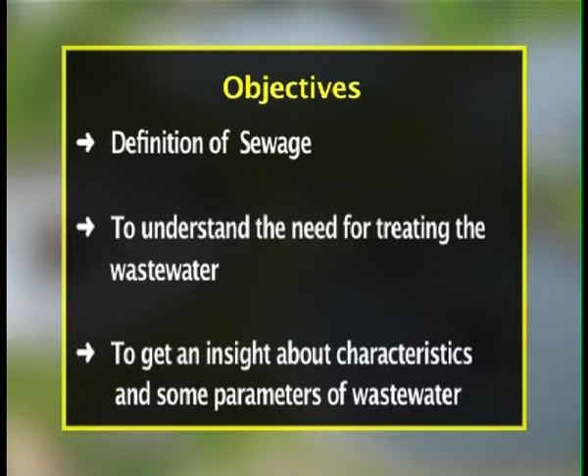Objectives of our study are: definition of sewage, that is wastewater; to understand the need for treating the wastewater; to get an insight about characteristics and some parameters of wastewater; to know about the whole process of conventional wastewater treatment; and lastly, to study the importance of disinfection of treated water.

Water is vital to the existence of all living organisms, but this valued resource is increasingly being threatened as human populations grow and demand more water of high quality for domestic purposes and economic activities. Among the various environmental challenges that India is facing this century, freshwater scarcity ranks very high.

India, being an economy in transition, faces two problems. On the one hand, there is a lack of infrastructure, and on the other, an ever increasing urban population. This has thrown up two self-perpetuating problems, that is, shortage of water and sewage overload. Water supply, sanitation measures, and management of sewage and solid wastes cover only a fraction of the total urban population.

There is a clear inequity and disparity between the public services received by inhabitants, depending on their economic strata. Slum dwellers have always received least attention from the civic authorities. The majority of towns and cities have no sewerage and sewage treatment services.

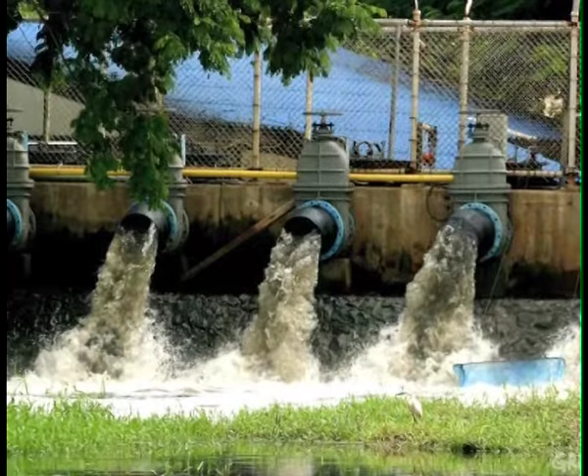Wastewater is not just sewage. All the water used in the home that goes down the drains or into the sewage collection system is wastewater. This includes water from baths, showers, sinks, dishwashers, washing machines, and toilets. Small businesses and industries often contribute large amounts of wastewater to sewage collection systems. In combined municipal sewage systems, water from storm drains is also added to the municipal wastewater stream.

Wastewater is about 99% water by weight and is generally referred to as influent as it enters the wastewater treatment facility. Domestic wastewater is wastewater that comes primarily from individuals and does not generally include industrial or agricultural wastewater. At wastewater treatment plants, this flow is treated before it is allowed to be returned to the environment, lakes or streams.

Dear students, now let us discuss wastewater generation and its treatment. It's estimated that about 38,254 million litres per day of wastewater is generated in urban centres comprising class 1 cities and class 2 towns having population of more than 50,000, accounting for more than 70% of total urban population. In view of population increase, demand of fresh water for all uses will become unmanageable.

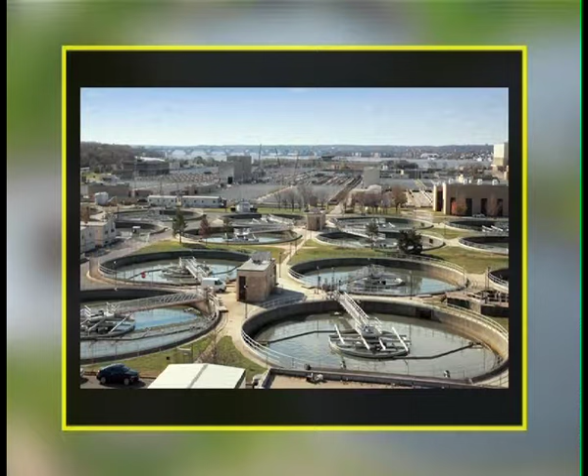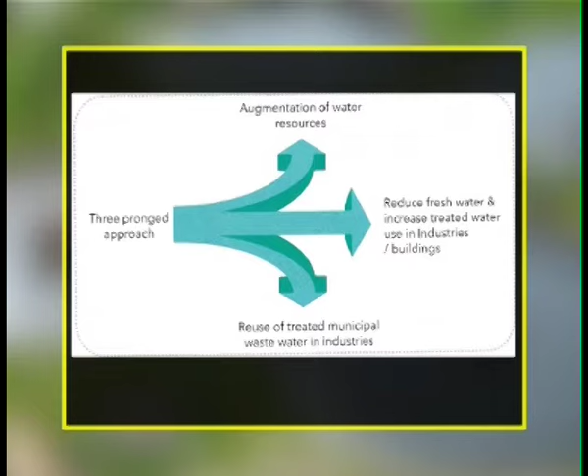Central Pollution Control Board studies depict that there are 269 sewage treatment plants in India, of which only 231 are operational, and thus the existing treatment capacity is just 21% of the present sewage generation. There is a need to plan strategies and give thrust to policy, giving equal weightage to augmentation of supplied water as well as development of wastewater treatment facilities, recycling, recovery, recharging and storage.

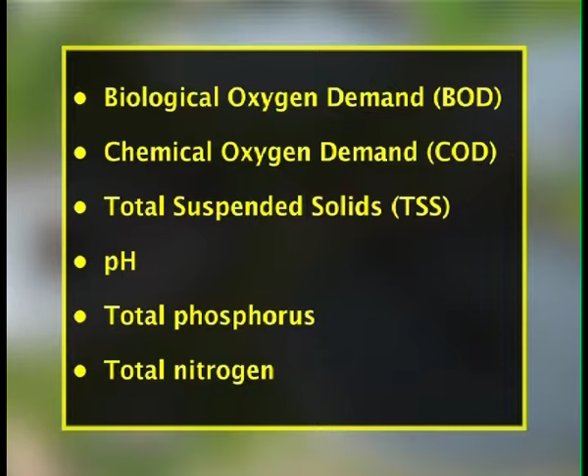Now, let's discuss the characteristics of urban wastewater. Urban wastewater is characterized in terms of its physical, chemical and biological constituents. The more common analyses used to characterize wastewater entering and leaving a plant are biological oxygen demand, chemical oxygen demand, total suspended solids, pH, total phosphorus and lastly total nitrogen.

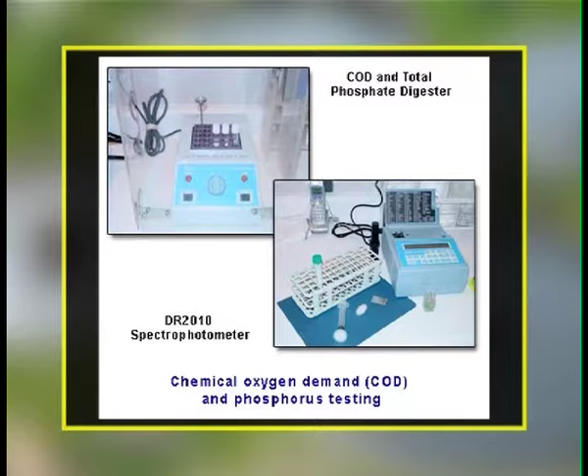Now the parameters by which wastewater is measured. Firstly, the biological oxygen demand, BOD. BOD is the amount of oxygen used by organisms while consuming organic matter in a wastewater sample. It's possible to assess the performance of a wastewater treatment plant by measuring the BOD of the inflow and the outflow. Many factors can influence this test, such as temperature of incubation, dilution rate, nitrification, toxic substances, nature of bacterial seed and presence of anaerobic organisms.

Now, chemical oxygen demand. The COD test uses the oxidizing agent potassium dichromate to oxidize organic matter in the sample. The test is extensively used because it takes less time than other tests such as BOD, which takes 5 days. The COD test does not, however, differentiate between biodegradable and non-biodegradable organic matter.

For municipal wastewater, it is generally possible to establish a relationship between COD and BOD. Once a correlation has been established, the COD test can be a very useful indicator for the operation and control of the plant.

Total suspended solids, also termed as TSS. TSS is the sum of the organic and inorganic solid concentrations and can be subdivided into suspended solids, organic solids, inorganic solids and lastly colloidal suspended solids. Firstly, the suspended solids. Suspended solids represent those solids that are in suspension in the water, generally comprised of 70% organic and 30% inorganic solids, and can be removed by physical or mechanical means.

Secondly, organic solids. Organic solids form about 50% of solids present in urban wastewater, derived from the waste products of animal and vegetable life. Sometimes also called the combustible fraction or volatile solids, as these can be driven off by high temperature. Inorganic solids. These substances are inert and are not subject to decay, and these include sand, gravel, silt.

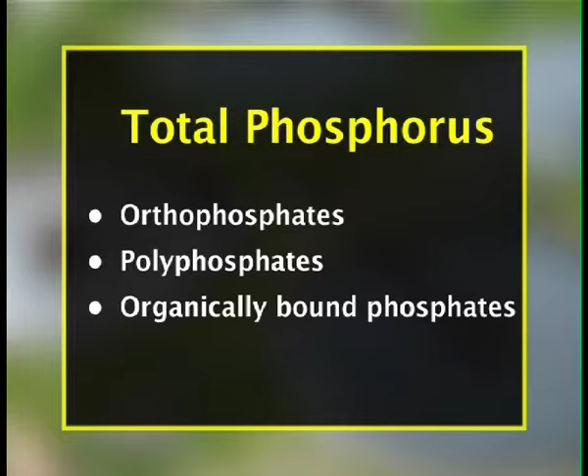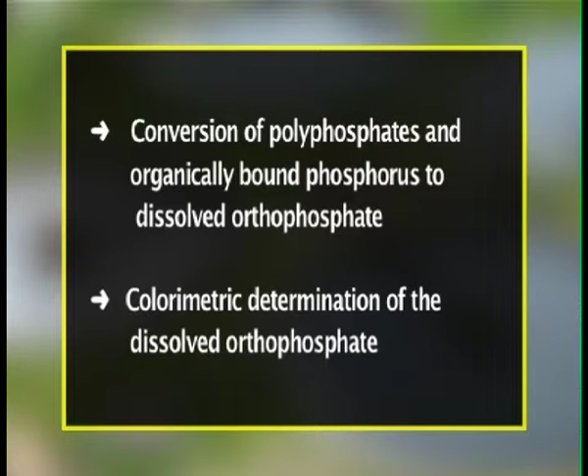Now, total phosphorus. This parameter is normally divided into 3 fractions, namely orthophosphate, polyphosphate, and organically bound phosphate. Total phosphorus analysis requires 2 steps: conversion of polyphosphates and organically bound phosphorus to dissolved orthophosphate, and colorimetric determination of the dissolved orthophosphate. In instances where phosphorus is a growth limiting nutrient, the discharge of wastewater containing phosphorus may stimulate the growth of vegetation in the water body.

Lastly, the total nitrogen. This refers to the sum of measurements of total oxidized nitrogen, that is nitrate and nitrite, and total Kjeldahl nitrogen, that is ammonia and organic nitrogen. This parameter is a growth limiting nutrient in marine environments, and a limit is specified in urban wastewater treatment regulations for discharge to sensitive water bodies.

Now the BOD to nitrogen to phosphorus ratio. In order to operate satisfactorily, microorganisms require a balanced diet. This is normally achieved by maintaining the level of BOD to nitrogen to phosphorus in the wastewater at about the ratio of 100 to 5 to 1. Domestic sewage is not normally deficient in these elements, but industrial effluents may be, and this can lead to a nutrient deficiency in the inflow to a plant.

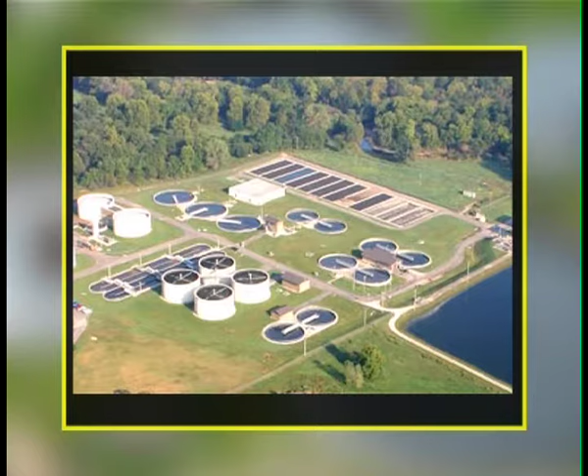Now, let us talk about conventional wastewater treatment processes. Conventional wastewater treatment consists of a combination of physical, chemical and biological processes and operations to remove solids, organic matter and sometimes nutrients from wastewater.

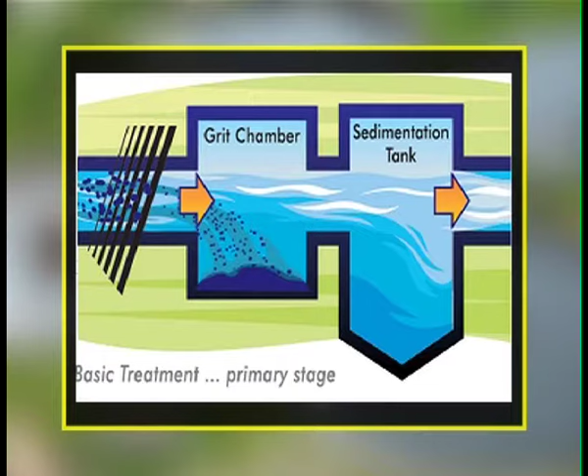Firstly, the preliminary treatment. The objective of preliminary treatment is the removal of coarse solids and other large materials often found in raw wastewater. Removal of these materials is necessary to enhance the operation and management of subsequent treatment units. Preliminary treatment operations typically include coarse screening, grit removal, etc.

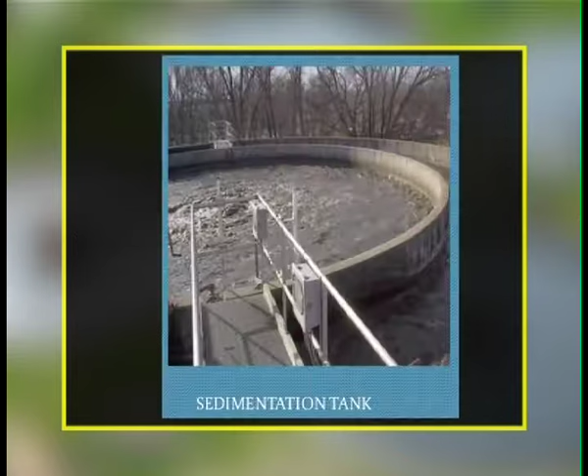Now, the primary treatment. The objective of primary treatment is the removal of settleable organic and inorganic solids by sedimentation and the removal of materials that will float, that is scum, by skimming.

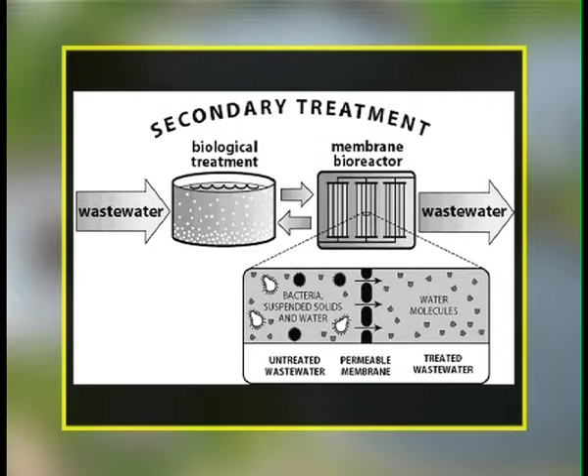Secondary treatment. The objective of secondary treatment is the further treatment of effluent from primary treatment to remove the residual organics and suspended solids. In most cases, secondary treatment follows primary treatment and involves the removal of biodegradable dissolved and colloidal organic matter using aerobic biological treatment processes.

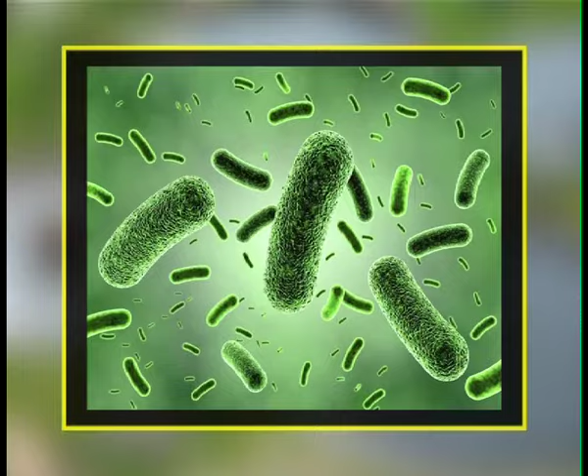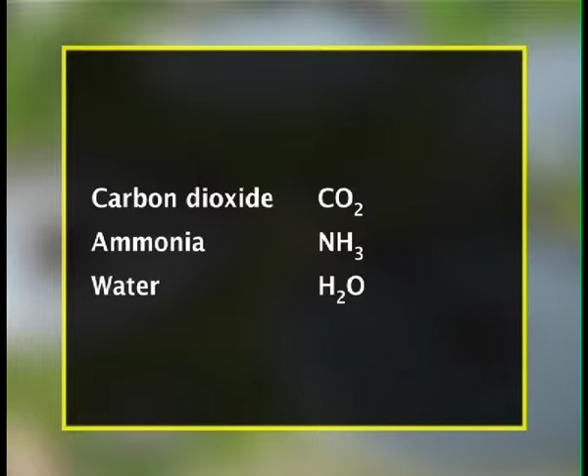Aerobic biological treatment is performed in the presence of oxygen by aerobic microorganisms, principally bacteria, that metabolize the organic matter in the wastewater, thereby producing more microorganisms and inorganic end products, principally carbon dioxide, ammonia and water. Several aerobic biological processes are used for secondary treatment, differing primarily in the manner in which oxygen is supplied to the microorganisms and in the rate at which organisms metabolize the organic matter.

Common high-rate processes include the activated sludge processes, trickling filters or biofilters, oxidation ditches, and rotating biological contactors. A combination of two of these processes in series, for example, biofilter followed by activated sludge, is sometimes used to treat municipal wastewater containing a high concentration of organic material from industrial sources.

Now, activated sludge process. The common suspended growth process used for municipal wastewater treatment is the activated sludge process. The municipal wastewater treatment is the biochemical oxygen demand removal. The removal of BOD is done by a biological process such as the suspended growth treatment process.

The biological process is an aerobic process and takes place in the aeration tank in which the wastewater is aerated with oxygen. By creating good conditions, bacteria will grow fast. The growth of bacteria creates flocs and gases. These flocs are removed by a secondary clarifier.

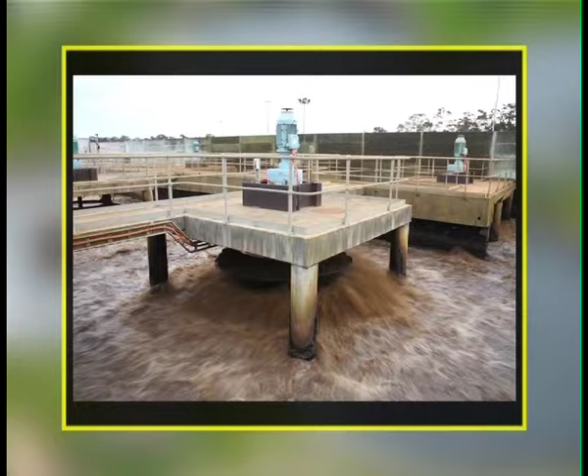In the activated sludge process, the dispersed growth reactor is an aeration tank or basin containing a suspension of wastewater and microorganisms, that is the mixed liquor. The contents of the aeration tank are mixed vigorously by aeration devices which also supply oxygen to the biological suspension.

Hydraulic retention time in the aeration tanks usually ranges from 3 to 8 hours but can be higher with high BOD wastewaters. Following the aeration step, the microorganisms are separated from the liquid by sedimentation and the clarified liquid is secondary effluent.

A portion of the biological sludge is recycled to the aeration basin to maintain a high mixed liquor suspended solids level. The remainder is removed from the process and sent to sludge processing to maintain a relatively constant concentration of microorganisms in the system.

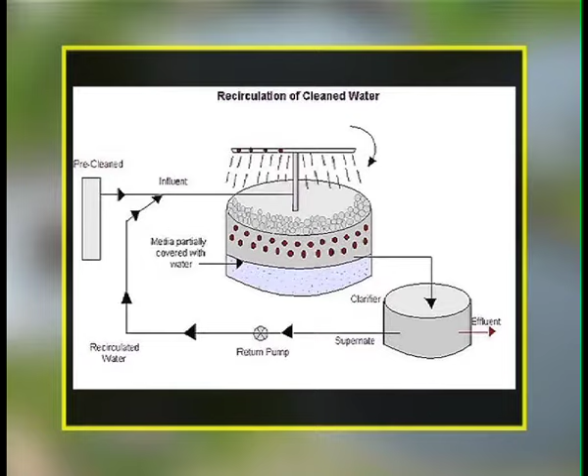Now, the trickling filters. A trickling filter or biofilter consists of a basin or tower filled with support media such as stones, plastic shapes or wooden slats. Wastewater is applied intermittently or sometimes continuously over the media. Microorganisms become attached to the media and form a biological layer of fixed film.

Organic matter in the wastewater diffuses into the film where it is metabolized. The thickness of the biofilm increases as new organisms grow. Periodically, portions of the film slough off the media. The sloughed material is separated from the liquid in a secondary clarifier and discharged to sludge processing.

Clarified liquid from the secondary clarifier is the secondary effluent, and a portion is often recycled to the biofilter to improve hydraulic distribution of wastewater over the filter.

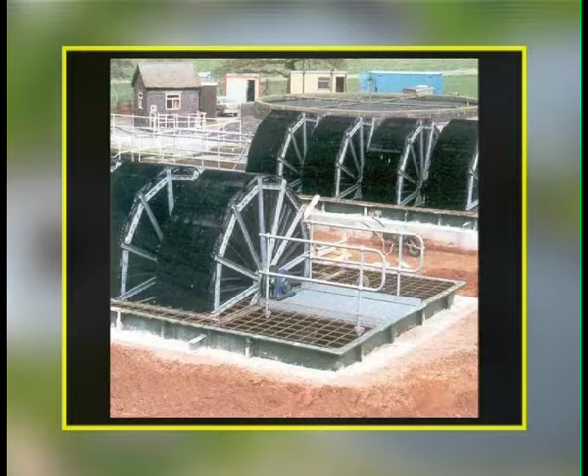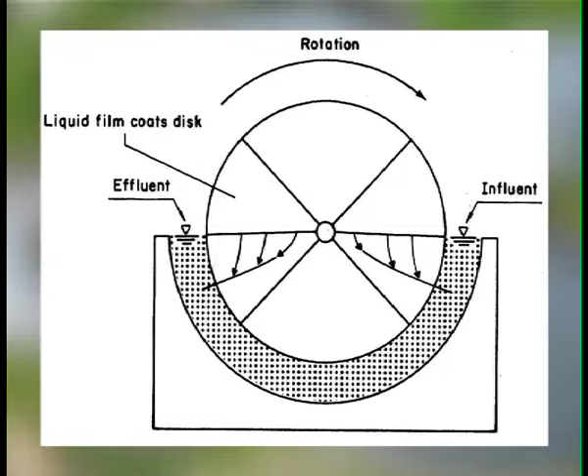Rotating biological contactors. Rotating biological contactors are fixed film reactors similar to the biofilters in that organisms are attached to the support media. In the case of RBCs, the support media are slowly rotating discs that are partially submerged in flowing wastewater in the reactor.

When coupled with a disinfection step, these processes can provide substantial but not complete removal of bacteria and viruses. However, they remove very little phosphorus, nitrogen, non-biodegradable organics or dissolved minerals.

Now, let's get an insight about the upflow anaerobic sludge blanket process. The UASB is an anaerobic process whilst forming a blanket of granular sludge suspended in the reaction tank. Wastewater flows upwards through the blanket and is processed by the anaerobic microorganisms. The upward flow combined with the settling action of gravity suspends the blanket with the aid of flocculants.

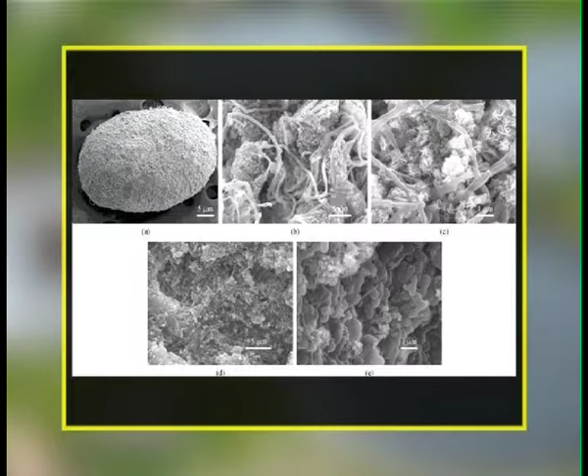The blanket begins to reach maturity at around 3 months. Small sludge granules begin to form whose surface area is covered in aggregations of bacteria. In the absence of any support matrix, the flow conditions create a selective environment in which only those microorganisms capable of attaching to each other survive and proliferate.

The fine granular sludge blanket acts as a filter to prevent the solids in the incoming wastes from flowing through as the liquid part does. Biochemical activities in UASB digesters comprise bacterial actions which have 3 phases, and they occur in this sequence.

Firstly, hydrolysis or solubilization. The first phase takes 10 to 15 days, and until the complex organics are solubilized, they cannot be absorbed into the cells of bacteria where they are degraded by the endoenzymes. Secondly, acidogenesis or acetogenesis. The result from stage 1 is utilized by a second group of organisms to form organic acids.

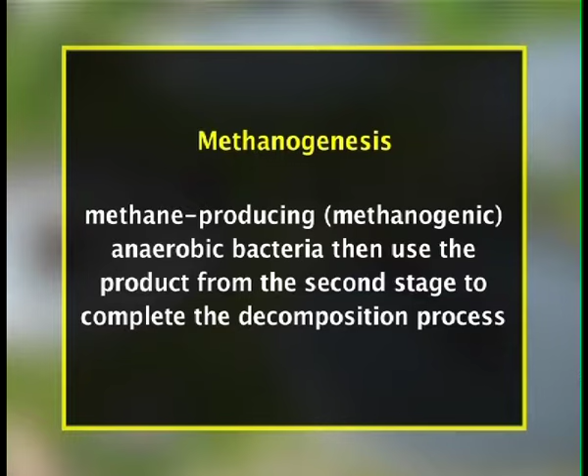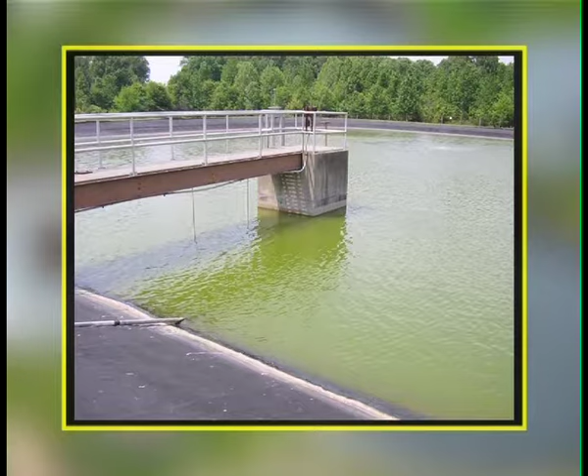Lastly, the methanogenesis. The methane producing or methanogenic anaerobic bacteria then use the product from the second stage to complete the decomposition process.

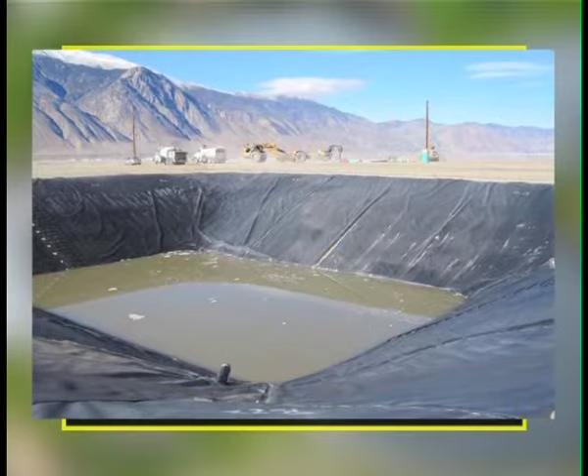Waste stabilization ponds. Wastewater stabilization pond technology is one of the most important natural methods for wastewater treatment. Waste stabilization ponds are mainly shallow, man-made basins comprising a single or several series of anaerobic, facultative or maturation ponds.

Firstly, the anaerobic pond. These units are the smallest of the series. Commonly, they are 2 to 5 meters deep and receive high organic loads equivalent to 100 grams BOD per cubic meter per day. These high organic loads produce strict anaerobic conditions throughout the pond.

In general terms, anaerobic ponds function much like open septic tanks and work extremely well in warm climates. A properly designed anaerobic pond can achieve around 60% BOD removal at 20 degrees Celsius. Facultative ponds. These ponds are of 2 types, primary facultative ponds and secondary facultative ponds.

Primary facultative ponds receive raw wastewater and secondary facultative ponds receive the settled wastewater from the first stage, usually the effluent from anaerobic ponds. Facultative ponds are designed for BOD removal on the basis of a low organic surface load to permit the development of an active algal population. This way, algae generate the oxygen needed to remove soluble BOD. The concentration of algae in an optimally performing facultative pond depends on organic load and temperature, but is usually in the range of 500 to 2000 micrograms chlorophyll per liter.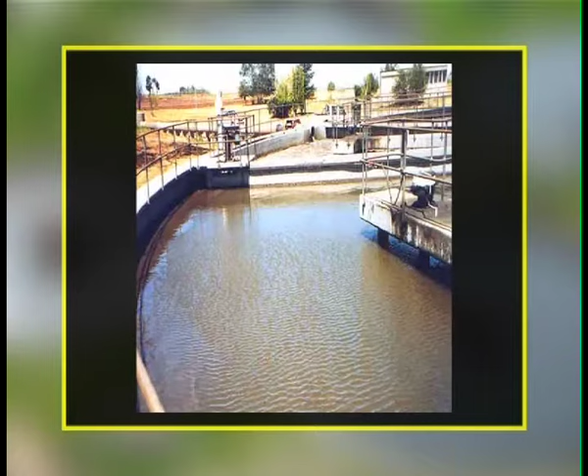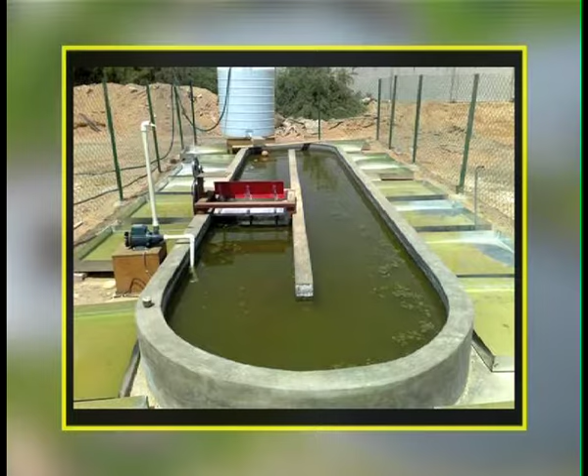Maturation ponds. These ponds receive the effluent from a facultative pond, and the size and number depend on the required bacteriological quality of the final effluent. Maturation ponds are shallow, 1.0 to 1.5 meter, and show less vertical stratification, and the entire volume is well oxygenated throughout the day. The main removal mechanisms, especially of pathogens and fecal coliforms, are ruled by algal activity in synergy with photooxidation. On the other hand, maturation ponds achieve only a small removal of BOD, but their contribution to nitrogen and phosphorus removal is more significant.

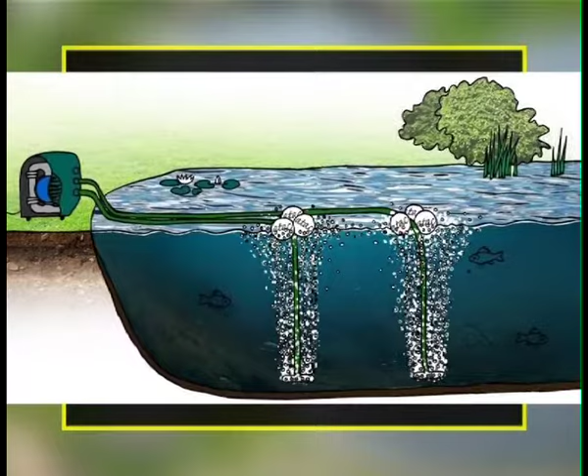Aerated lagoons. The mechanical biological purification of wastewater takes place in one or more aerated lagoons according to the size of the plant, which are followed by a non-aerated sedimentation and polishing pond. The sewage coming from the canalization is normally led directly into the first aerated lagoon without mechanical purification. Matter liable to putrefy should mainly be stabilized by aerobic processes to avoid odors and digested sludge coming up to the water surface.

The oxidation ponds. Oxidation ponds are also known as stabilization ponds or lagoons. They are used for simple secondary treatment of sewage effluents. Within an oxidation pond, heterotrophic bacteria degrade organic matter in the sewage to produce cellular material and minerals. The production of these supports the growth of algae in the oxidation pond.

Fluidized bed reactor. Aerobic fluidized bed reactors, FBRs, are used as a new technology in wastewater treatment. An aerobic fluidized bed reactor with granulated activated carbon as carrier material can be operated under different conditions, including batch loading, semi-continuous loading and continuous loading. The basic idea behind the FBR is to have a continuously operating non-clogging biofilm reactor which requires no backwashing, has low head loss and high specific biofilm surface area. The FBR employs the fixed film principle and makes the treatment process more user friendly because it does not require sludge recycle, which is synonymous with the conventional activated sludge process.

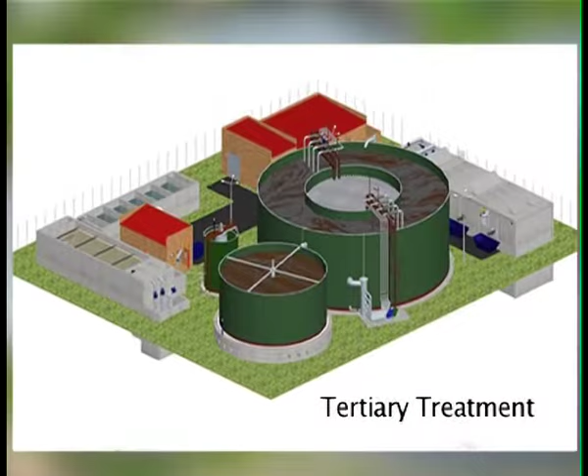The system selected is capable of achieving firstly biodegradation of organics present in the wastewater by extended aeration process, secondly oxidation of sulfides in the wastewater, thirdly concurrent nitrification and denitrification of ammonical nitrogen in the aeration zone, and lastly removal of phosphorus. Now the tertiary treatment.

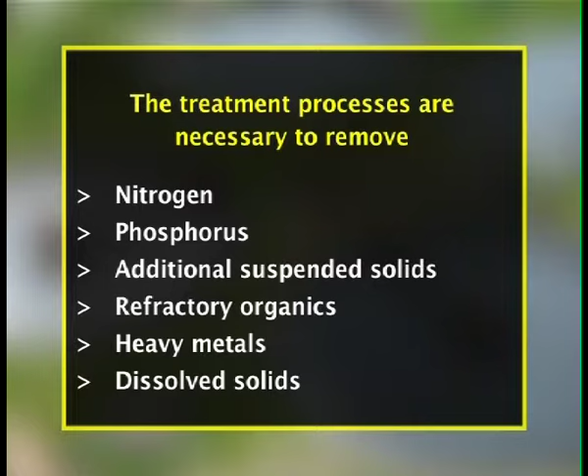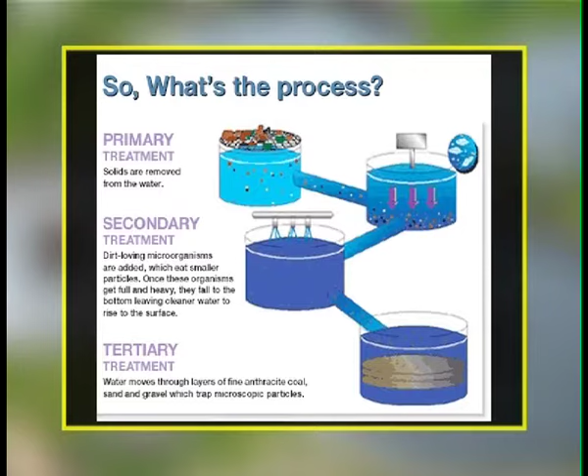Tertiary wastewater treatment is employed when specific wastewater constituents which cannot be removed by secondary treatment must be removed. The treatment processes are necessary to remove nitrogen, phosphorus, additional suspended solids, refractory organics, heavy metals and dissolved solids. Because advanced treatment usually follows high rate secondary treatment, it is sometimes referred to as tertiary treatment. However, advanced treatment processes are sometimes combined with primary or secondary treatment or used in place of secondary treatment. For example, overland flow treatment of primary effluent.

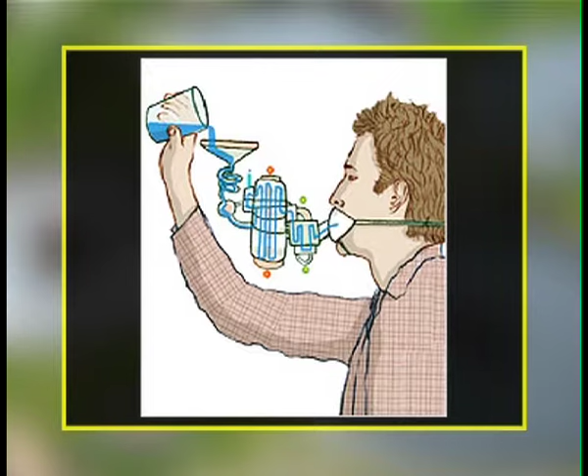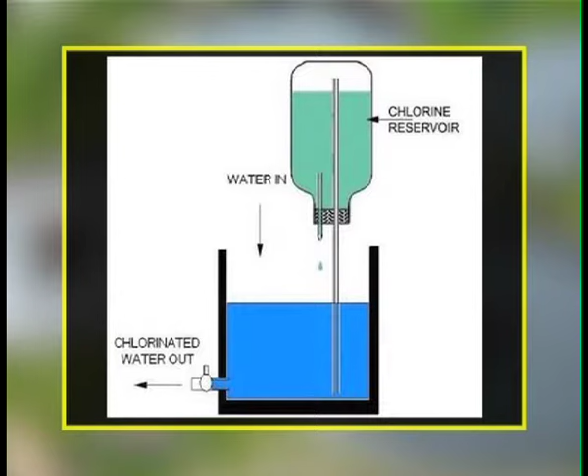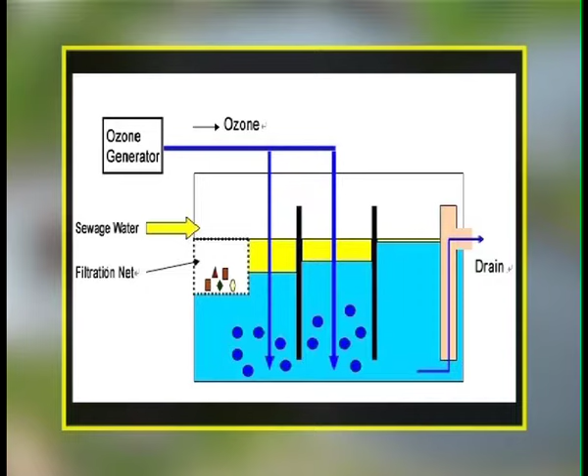Now, about the disinfection of this treated water. Disinfection using chemical and physical methods is the final step in drinking water purification. The finished water is disinfected, often with chlorine. It kills the remaining microorganisms in the water, some of which may be pathogenic. It is a very efficient oxidizing, bleaching and disinfecting agent. A principal advantage of chlorination over other forms of disinfection is that a chlorine residual is created that can protect the treated water after leaving the treatment plant.

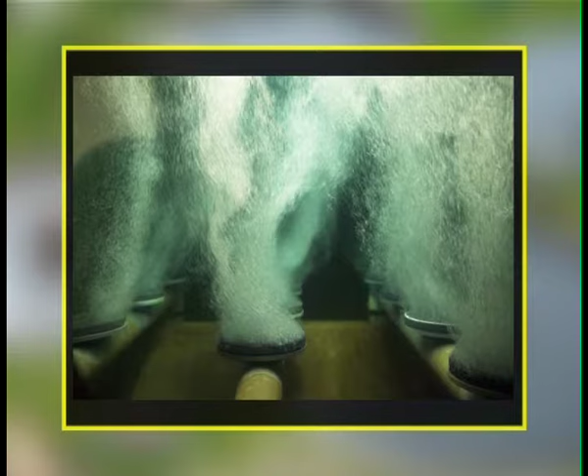Ozonation is another form of disinfection. Ozonation involves the passage of ozone through water. Ozone is a very powerful disinfectant that is even more effective against cysts and viruses than chlorine, and it has the added advantage of having no taste or odor problems.

Lastly, I would like to conclude by saying that there is a need to generate water from all available resources, including wastewater, by recycling, reuse, recharging and storage.